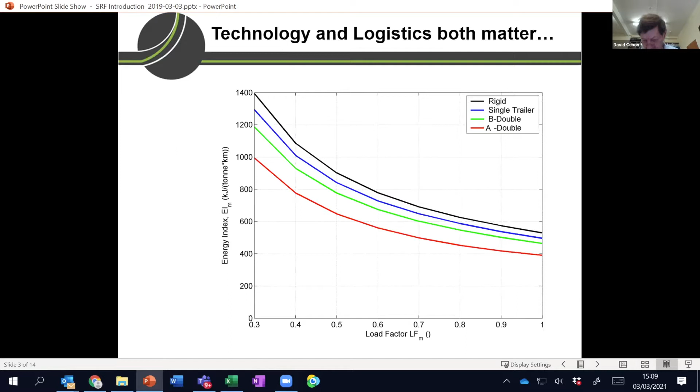Let me just show you one little graph. This graph shows the energy performance, the amount of energy used by a vehicle in a journey as a function of its load factor. Here are 4 different types of vehicles - the load factor is 1 if the vehicle is loaded in both directions, and 0.5 if it comes home empty. You can see a couple of things: one is that if your vehicle was going to come home empty, but came home full instead, you would use 40% less fuel for the round trip. That's a lot less fuel. It's very hard - you can spend billions of pounds, euros, dollars improving engine performance or changing to electric vehicles, and it's pretty hard to get 40%, but just filling the vehicle up and coming home full gives you that.

So 40% is a lot in this game. Of course, the vehicle type matters too - you can see here that in general, if you use a larger vehicle, you use less fuel per ton kilometre of freight transported. So there's an engineering aspect of this - bigger vehicles use less fuel. There's a logistics aspect, which is come home full if you possibly can. So you can see that both of these, broadly, the message is both engineering and logistics matter. There's a lot more to it than that, but that gives you the overall picture.

Our centre focuses on 3 main things: technology and operations and policy, or engineering and logistics and policy. The organisations fit within this framework. In Cambridge, we focus on the engineering side, and Heriot-Watt's Logistics Research Centre focuses on the logistics side. Westminster is halfway between logistics and policy - we do a lot of our policy work there.

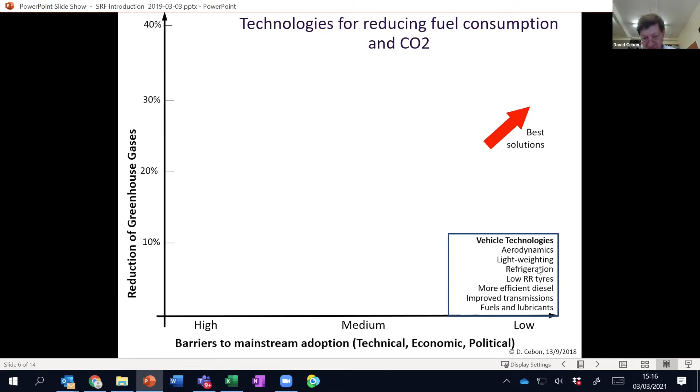I can plot solutions across this whole space - energy reduction technologies down here in the right-hand corner, which typically can save 10% carbon, like improvements to aerodynamics. They have low barriers to adoption, they're easy to do, and we're doing them now, and we can improve on those things. You can do driver training and so on. There's all kinds of solutions which fit across this whole map.

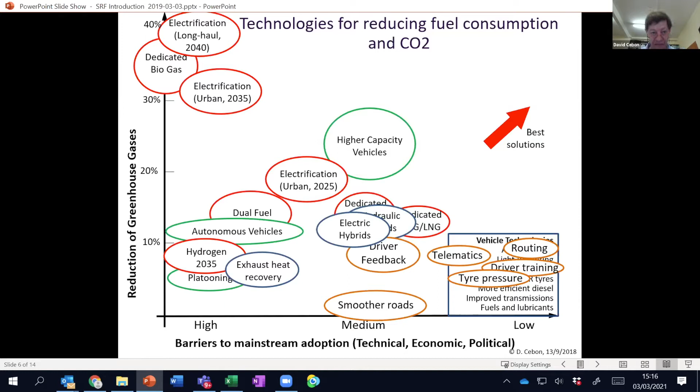And none of them are in the top right-hand corner, which is where the very best ones would be. There's a bunch of solutions that are high up on the left-hand side of this graph, even higher up than the ones that are shown, and they are the real silver bullets that are out there, but they have high barriers to adoption. They've got all kinds of issues that have to be solved before they can be adopted.

We look in the center at a set of technologies which are basically in the upper right-hand corner of this chart - they're the ones we're looking at for research purposes. We don't look at the ones down the bottom left-hand corner because they have small benefits and high barriers. We think about projects that can reduce barriers to these big win technologies, like electrification of the long haul or electrification of urban vehicles, biogas, and so on. Can we reduce those barriers and push them to the right? Can we increase the impact of the things down the bottom, improve the performance gained by aerodynamics or lightweighting, driver performance?

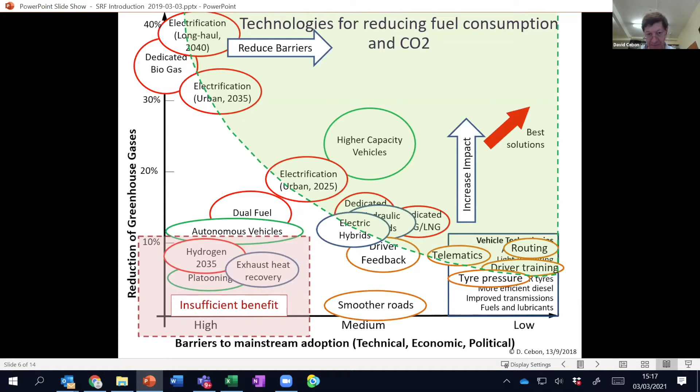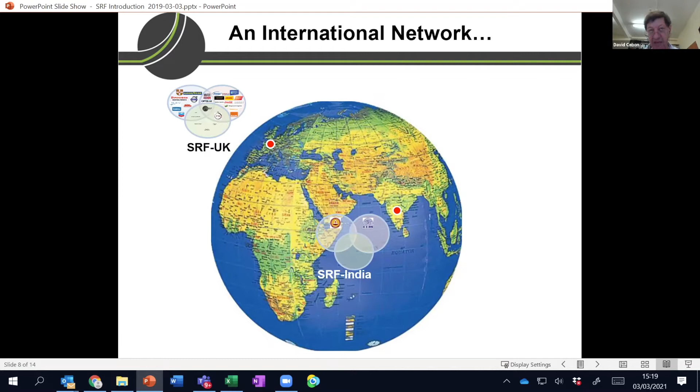Just one other broad thing is that we have our little organization in the UK, Centre for Sustainable Road Freight. We think it's very important that the whole world decarbonizes road freight. We've set up a partner organization in India with IIT Madras and IIM Ahmedabad, two really top schools for engineering and logistics.

We set up another organization in China with Jilin, Tongji and Zhejiang universities, again in logistics and engineering, and another one in South Africa with WITS and Stellenbosch universities. In each case, there's a bunch of industry partners on both sides, on logistics and engineering and policy. So we've set up these four organizations all around the world, and that's a great system because we all have the same mission and we all have the same structure and we all partner together.

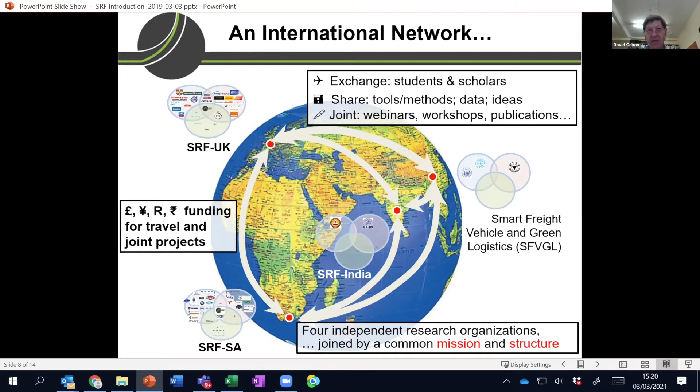Looking at each other's problems, we can exchange students and scholars, we can share tools and methods and data and ideas, and we have joint webinars and can write publications together. It's quite easy to get funding for travel, in the old days when we used to do that, and joint projects and so on.

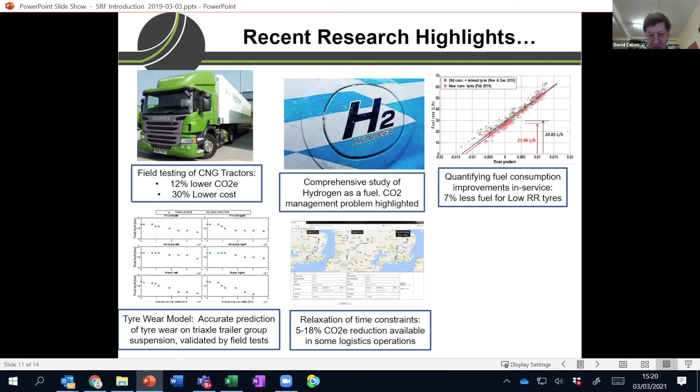I will not go over research highlights because I don't have time, there's lots of them. I'll draw some conclusions. We've got a strong ecosystem consisting of industry, government, academia. We've got customers and suppliers and partners and regulators, all in the pot, all working on sustainable road freight issues.

We've got a strong research team across logistics, engineering, and policy. We've got a holistic approach to R&D in the sector, from the logistics and operations, the soft side, to the engineering and science, the harder side, to the policy. We've got a global problem, and so we've set up a global international network.

We think we have an opportunity to make a significant difference to the about 7 or 8% of the world's carbon dioxide which is emitted by road freight. Thank you.

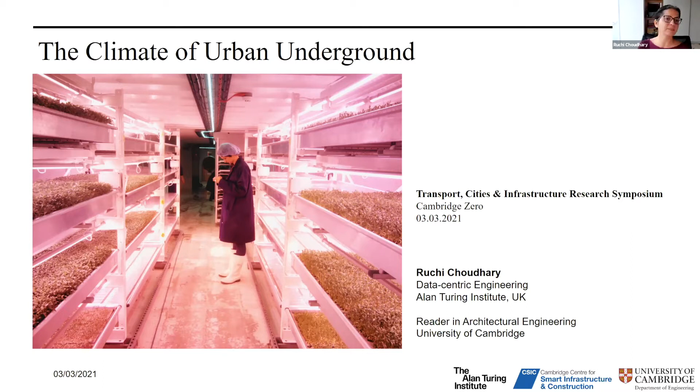So I'm going to be speaking of the subsurface. I'm going to take you to the underground, and it puts us right at the interface of infrastructure, cities, and transport infrastructure in particular. And I'm going to be talking about how to sustain the climate of the subsurface. Often when we speak about climate issues, climate change in particular, we are very much focused on the city above ground, and naturally so - it's something very visible, we can see the effect. But at the same time, we have plenty of reasons why we need to also track the climate of the underground. So why do we need to do so?

With urbanization and land constraints, we see increased use of underground surfaces or spaces with deeper underground structures, which leads to different so-called phenomena of subsurface congestion. In fact, we're not the only ones - people have become aware of the need to regulate and understand the subsurface, and it's a well-established area of study in geography and environmental studies. Indeed, the first master plans of the underground, which started looking at how to plan cities underground, arose in Helsinki and more recently in Singapore in 2019.

And within all this, whatever we build underground in terms of structures, whether we live in them or transport goods or services in them, they have a significant influence on the surrounding ground, its hydrogeological makeup - any time you give a heat input into the ground, it has an impact on ground temperatures, but also groundwater flow. So tracking underground climate is important for the resilience of ground resources such as water and energy, but also in the long term for the energy efficiency of your underground structures and any systems residing in the subsurface.

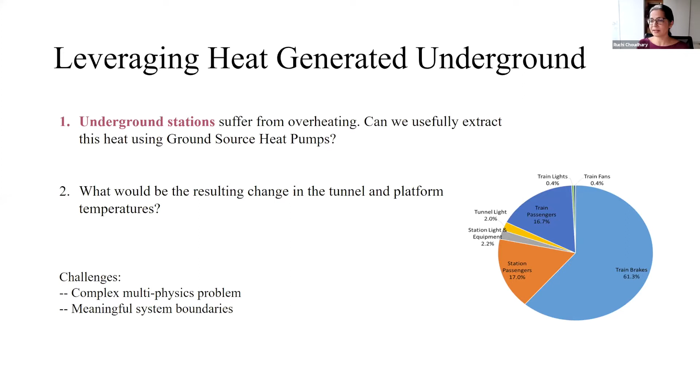That ends up being a complex multi-physics problem. Also, a lot of what happens in the subsurface is a big unknown. So it becomes very difficult to establish system boundaries when you're talking about entire train lines versus heat exchangers, not everywhere, but partially in some areas. We can only partially know where these train lines are running, and we know there's a whole mess buried with all sorts of infrastructure lines.

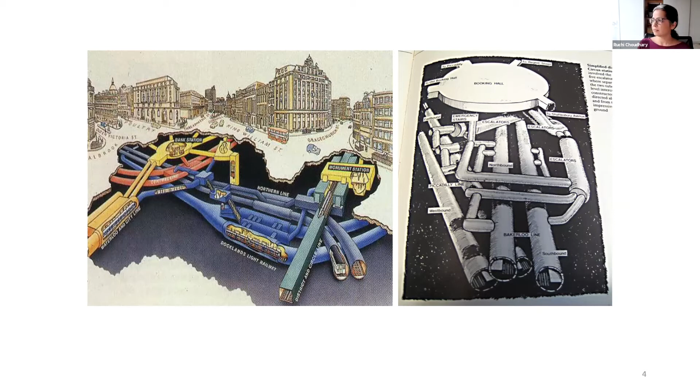So it's difficult, in a pragmatic sense, to tell where you can usefully leverage the heat that's generated. But it also comes with challenges with respect to timeline, because the best point at which to act is at the time when construction is being planned. Any retrofit later on is far more costly underground than when it's in planning stages.

With respect to model complexities, if you want to model an entire train line over several kilometers, that's a different kind of challenge. We found what suited best was to take an abstraction where we'd have a one-dimensional model of the Central Line as an example. So we started working with this, applying symmetry assumptions and similarities of stations across the line, and identifying which ones we need to model in more detail.

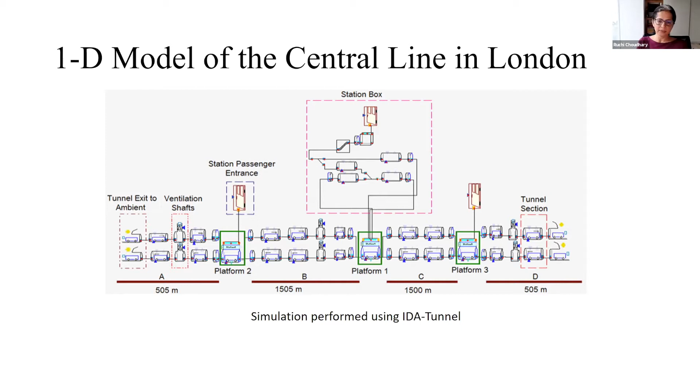But to integrate that with the analysis of the ground heat exchangers became a multi-physics problem, because the representation of the ground heat exchangers is a three-dimensional problem requiring different types of finite element solvers. So we did what we call a co-simulation framework, where two simulation worlds — the 1D Central Line model and the ground heat exchangers — could exist independently, but iterate and exchange information over time steps.

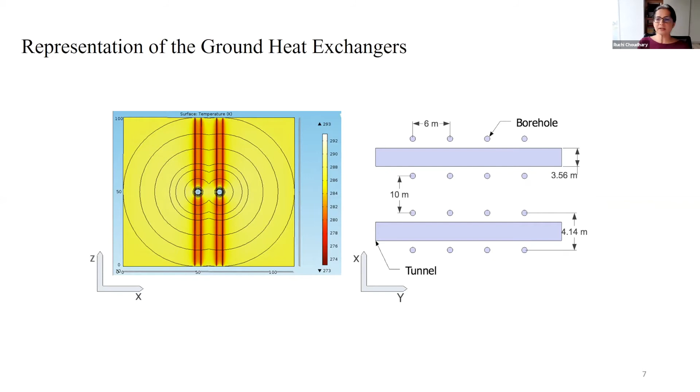The result of it, what we really wanted to show was how much we'd manage to cool the tunnels and platforms if we were to put heat exchangers in the ground surrounding the tunnels at different spacing and locations. Indeed, we can get up to a 5-degree difference if you extract heat that's generated in the tunnels, thereby saving you the need to cool the tunnels during summertime.

The co-simulation framework was important and necessary, rather than just assuming you'll extract a fixed amount of heat, because of the variability of behavior along the line — and to work out exactly what configurations of spacing along the boreholes and distance from the tunnels would make sense.

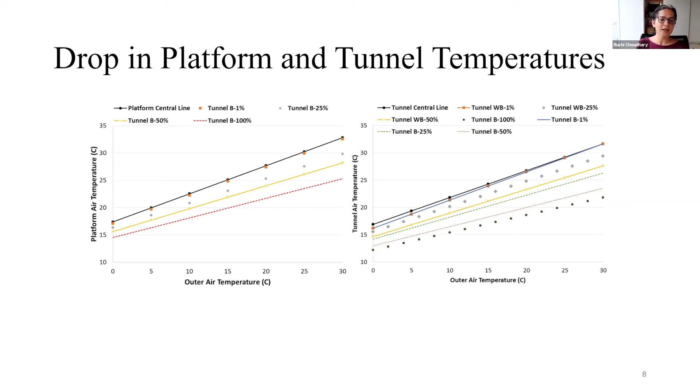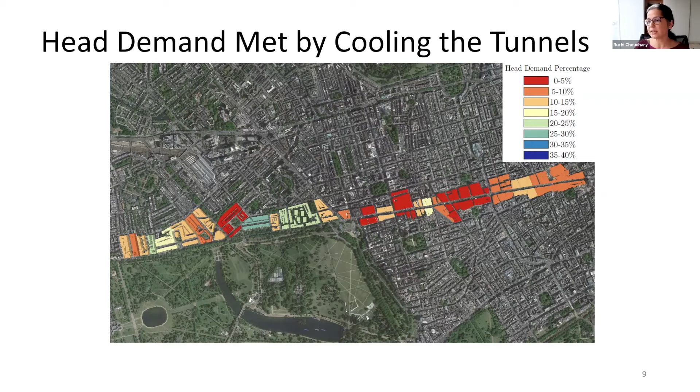With this information, we did further analysis and took a section of the line — you recognize Hyde Park, and on the north side, Regent's Park peeking down. We picked buildings around the Central Line and allocated them into clusters of similar thermal demand. Essentially, one borehole along the tunnel could serve the heating needs of one UK household on average, or the hot water demand of all the building types across all the clusters here.

Of course, the key assumption we made is that you're extracting uniformly along the tunnel line, and that we were optimizing the entire system to cool the tunnel rather than to extract as much heat as needed above ground. This was an exercise highly focused on saying: we want to cool the tunnel down by 5 degrees — if we extract that heat, how much will it serve above ground?

Moving forward from this project — I don't know if many of you were following the news three years earlier — there were a series of very interesting articles in the newspaper following a study conducted by geographers at Newcastle University, talking about underground development and its increase in London, in particular because of planning constraints.

My reaction to this was: if it doesn't affect the climate underground in the long term, then why not? Why can't we exploit resources underground to the extent that's possible? Sure, if there are 1,000 or 2,000 buildings having a marginal impact on the overall climate, you can continue to do that with no problem. But what if it started happening in a manner that was not regulated? So we said, okay, let's figure this out.

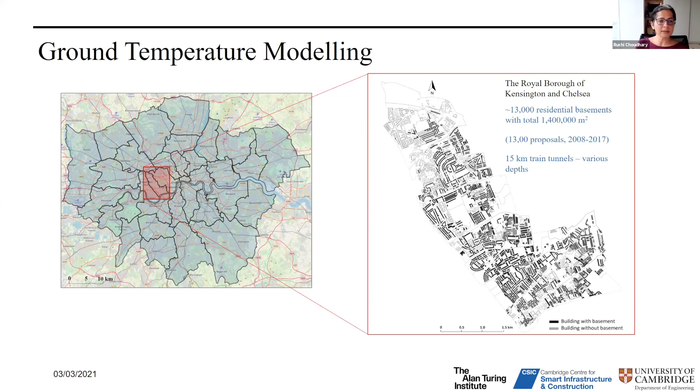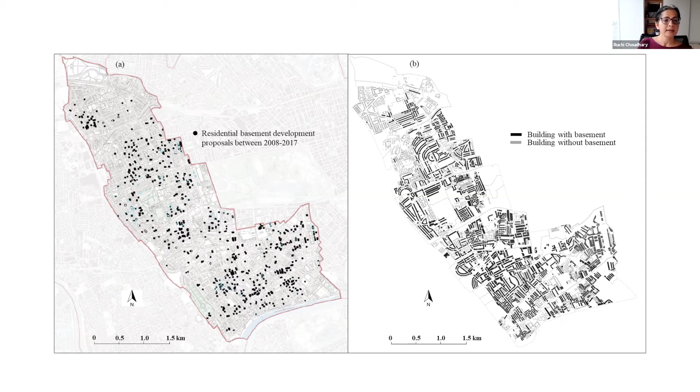This included also the new basement proposals that came through between 2008 and 2017. We added the train lines passing through the borough, along with the detailed geology and hydrological information we got from the British Geological Survey, who have been excellent partners ever since in this work.

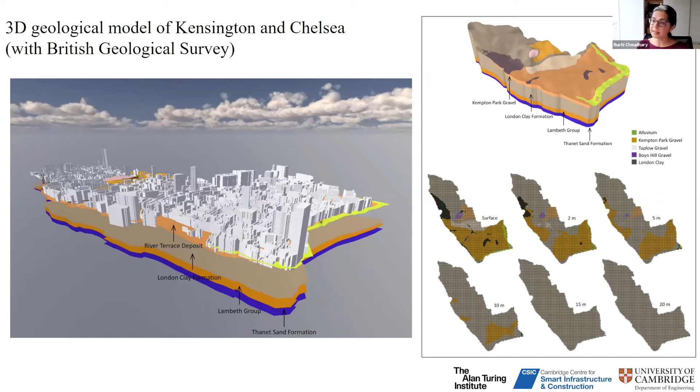With all of this information put together, we had to translate it into a numerical model, which required some degrees of abstraction - whether it's how to model the train tunnels as they go down, or how to model the entire 3D domain of the borough, as well as the residential basements, and of course the geology and hydrology.

On the contrary, if you're where the ground is more permeable - gravel in this case - the groundwater flow smears out the heat sources. So I'd be less concerned about where the ground heat exchangers were located in order to optimally extract that heat from the ground.

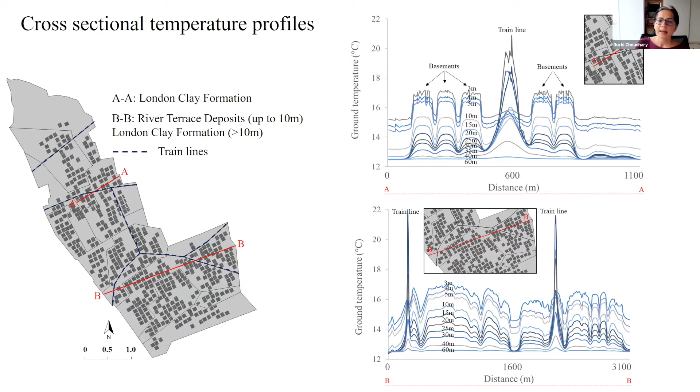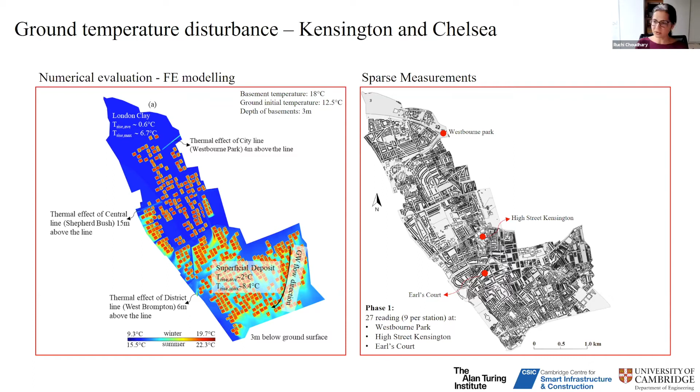One of the key challenges in doing such large-scale and complex models is that a lot of the input parameters you give can be highly uncertain. One of the ways we as engineers tackle that problem is we get some data and try to match our data and model. But that proves challenging at this scale, especially in the subsurface, because measurements are sparse.

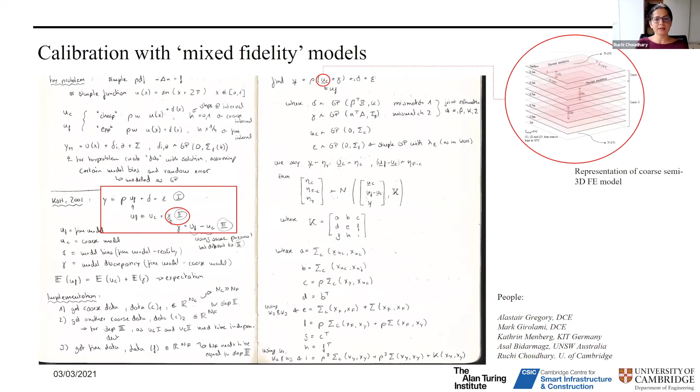So we've been working on tackling that challenge in terms of developing new kinds of calibration techniques with mixed fidelity models and sparse observations, to be able to infer a bit better on the most influential parameters that govern the behavior - in this case, the thickness of gravel, the density of basements, the initial temperature, or the surface cover type.

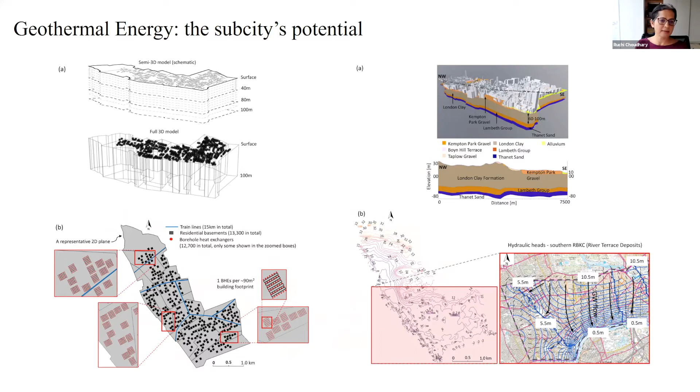Going forward, we did a similar exercise, taking all this information and doing a little exercise on the geothermal potential of this area. The key message here again: the left part is sitting primarily in the impermeable London clay formation, and the right part is in the terrace deposits.

Here we're trying to ensure the ground doesn't go below freezing point, because if you keep extracting heat from the ground, you'll freeze the ground at some point over the years. The effect is less when you're in the terrace deposits, because the behavior is governed so much by the groundwater flow, which smears it out - allowing extraction from most locations with much less of this ground-freezing phenomenon. Whereas on the left-hand side, you can be more susceptible, especially at greater depths.

The point is that there would be spatial variabilities of the subsurface potential, depending on what we're doing, and also on the hydrogeological makeup of the ground. That's important to consider as we begin to look into the subsurface for all kinds of exploitation, be it energy or space.

And I will stop here. We have a very good team working on this and good collaborations, and more ideas and more collaborations from the audience would be welcome.

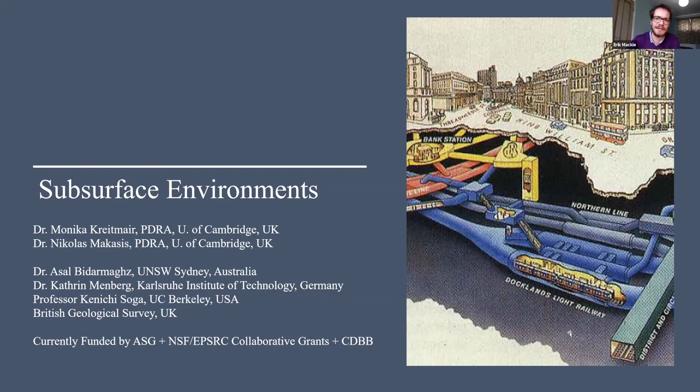Here's a question for you that's just come in on the Q&A, so let's go straight to that. The question is, can basements be dug out from scratch, or do they need to come at the creation of the building? I guess, can they come afterwards?

Well, I won't claim to be an expert on that, but if you walk around London, especially in the current climate where we do have the time and space to do construction, you'll see these boardings, and if you look carefully they will tell you these are dedicated new basement constructions happening on existing buildings. So yes, in terms of cost effectiveness, the ideal time is to do them earlier.

I was also going to ask, there's obviously a lot of potential here to use heat that's trapped or stored in the ground for a range of things, including heating of homes. So are you seeing much interest in application of what you're working on to use directly as heating for homes, as a way of decarbonising heating and getting away from gas in London and elsewhere?

Well, there has been a continuous interest in this, and in fact the biggest barrier is the cost of drilling the borehole. So it's the cost, but it's also the space that's needed. So that's always the challenge.

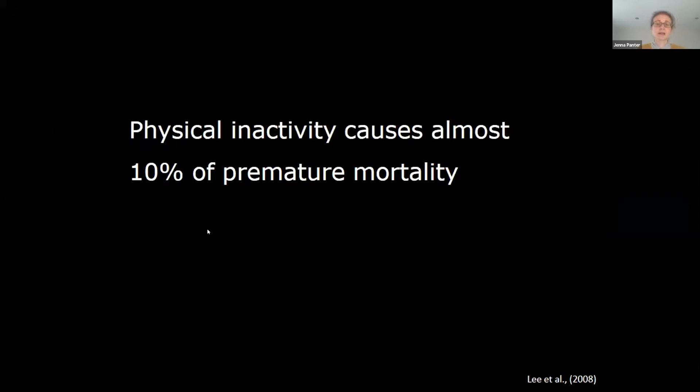Now, physical activity is a recognised strategy central to the prevention, treatment and management of diabetes and obesity. Physical inactivity itself was responsible for almost 10% of global premature mortality in 2008, which equated to about 5.3 million of the 57 million deaths that occurred worldwide in 2008.

So with the spread of COVID by airborne particulates, air quality and ventilation is higher on people's priority list. Results from an ecological study in the US suggest that areas with higher rates of air pollution also have correspondingly higher rates of COVID deaths. And these results are confirmed from a study in Italy. Whilst these studies are ecological in nature and therefore not conclusive, it suggests that people living in these areas may be more vulnerable and that action to tackle air pollution is even more important.

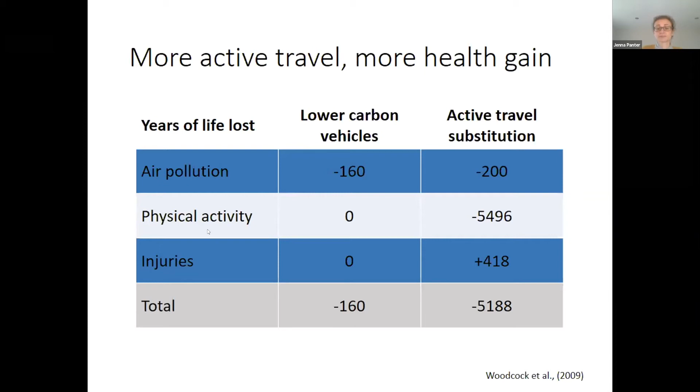So there may be concerns that shifting people to walking and cycling might not translate into gains for health if people compensate for that activity. Fortunately, our research has found that people who take up walking and cycling for transport don't compensate by doing less activity at other times, finding that when they take up these forms of travel, their levels of recreational activities such as going to the gym or playing football, and total activity, increase.

Similarly, for those who switch from the car to more active modes of travel, we see reductions in measures of body mass index, that measure of obesity I mentioned earlier from the Global Burden of Disease study.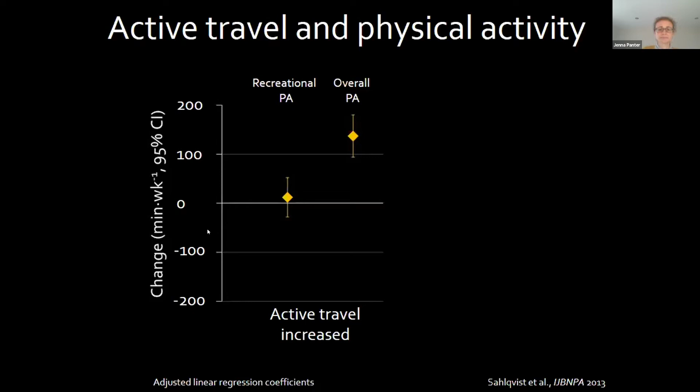So what are the carbon impacts of switching to walking and cycling for transport? A previous study in Cardiff showed that if 41% of car trips - those short trips, less than 3 miles, which are easily switchable - were made on foot or by bike, there would be about a 5% reduction in carbon emissions. The trips that were not easily switchable were ones where a short trip involved multiple destinations in the same trip.

That's so-called trip chaining - they involved escorting someone to or from a place, or shopping trips to large retail areas, which often involve the purchase of bulky items. Similarly, in a European study which followed 2,000 people over time, those who switched just one trip per day from car driving to cycling reduced their carbon footprint by about 0.5 tonnes a year, representing a substantial share of average per capita carbon dioxide emissions. The largest benefits from shifts were for business travel, followed by social and leisure trips, and commuting to work or study.

So how might we design our towns and cities to enable people to walk and cycle? Well, the historical and recent investments in road building will make that challenging. But what about if, alongside that, we built more footpaths, pavements and cycle lanes that connected with the public transport routes to make a more integrated and connected route?

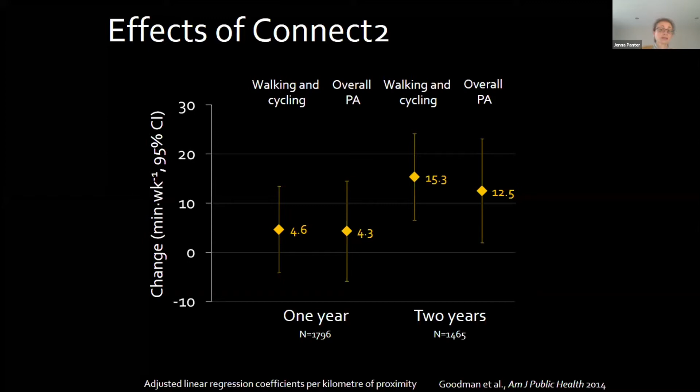So how did this new infrastructure impact on carbon emissions? Unfortunately, these effects didn't translate into sizable carbon effects, as neither living near the infrastructure nor using it predicted changes in carbon emissions, either overall or disaggregated by journey purpose.

So this lack of discernible effect on emissions is consistent with an interpretation that some living near the infrastructure may have simply changed where they walked or cycled, while others may have walked or cycled more, and many may have substituted active for motorised modes of travel, but few as a direct result of the intervention.

So while the findings to date can't exclude the possibility of small effects of the new routes on emissions, a more comprehensive approach of a higher dosage of active travel promotion, linked with policies targeted at reducing motorised transport, are needed if we're going to achieve the substantial carbon savings needed to meet climate change mitigation and energy security goals.

So our past work has shown that these policies to reduce driving could be really effective in changing behaviour. In a longitudinal study, we found that where people had no parking at work, they were much more likely to switch from a car to active modes.

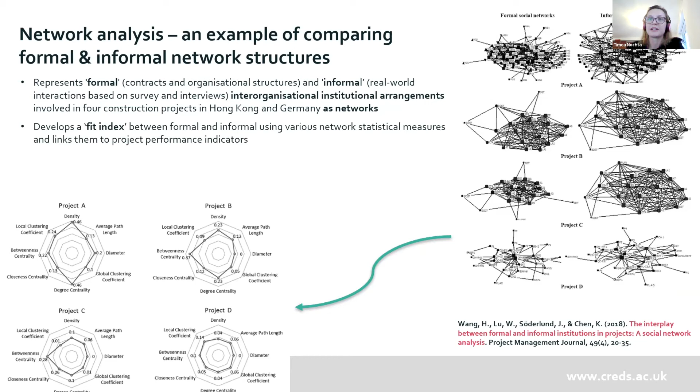It goes on to develop a fit index between the formal and informal networks using various network statistical measures, for example network density, average path length, node centrality measures, and then links them to project performance indicators. The authors found that this fit between formal and informal institutions is positively correlated with project performance. So this is an example that highlights the importance of understanding the interplay between formal and informal institutional arrangements and their impact on real-world outcomes, in this case project performance.

Going forward, in addition to the structural analysis of networks, we also want to understand how actors involved in these governance networks perceive the challenge of low carbon mobility and how this impacts the actions they take to address it. In order to do so, stakeholder workshops will be used to facilitate discussion and collaboratively identify variables perceived to affect movement towards low carbon mobility, for example issues such as propensity to cycle or access to funding.

Connections and causality between those variables, for example positive or negative links, will be identified. Workshop outcomes will then be represented as visual causal loop diagrams to facilitate discussion, to understand which of the variables participants feel they are in fact in a position to influence and why, and the extent to which they do influence them directly or indirectly.

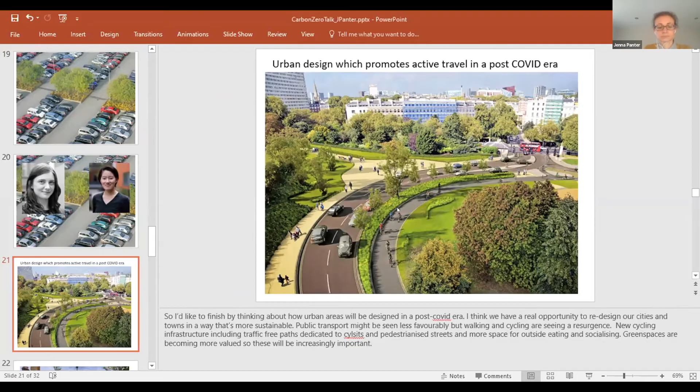Oops. Can you see those? Not yet, no. Okay. You see those now? It's just coming up now, yeah. Oops, yeah.

I keep worrying that I'm going to have a power cut suddenly and that I'll cut out. So I can just imagine the pain.

So I don't know at what point you lost me, but I think I was just talking about the disincentives and how hard they are to evaluate because they're not so politically and publicly acceptable. I was just going to say that Emma, who's a postdoc in our group, will speak later about some of the work we've done about understanding what needs to happen to get these interventions implemented. And one of our postdocs, Christina, I think has already spoken in this series about her review on these so-called carrots and sticks.

As she showed, there are relatively few studies that look at the before and after effects of these types of interventions. So I was just going to finish by reflecting on how I thought urban areas might be designed in a post-COVID era.

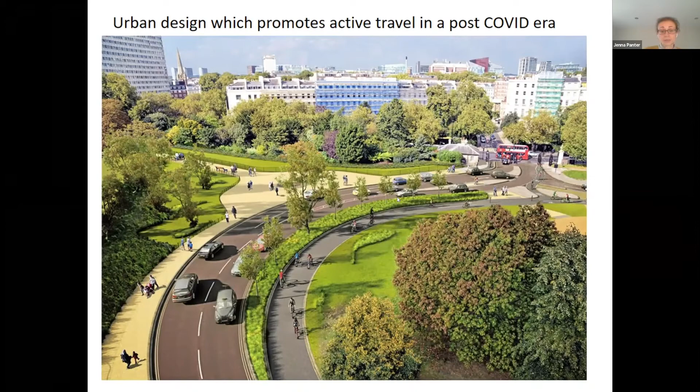I think we have a real opportunity to redesign our towns and cities in a way that's more sustainable. Public transport might be seen less favourably in the COVID context, but walking and cycling are seeing a real resurgence. So I think new cycling infrastructure, including traffic-free paths dedicated to cyclists, pedestrianised streets, and more green space for outside eating and socialising would be important. Green spaces are becoming more valued, so these will also be increasingly important. But with large swathes of land being unavailable, I think interventions like modal filtering of streets, which prioritises pedestrians and cyclists and restricts motor vehicles, are going to be much more common. They're going to be even more important for transport, but also as a place to meet and socialise.

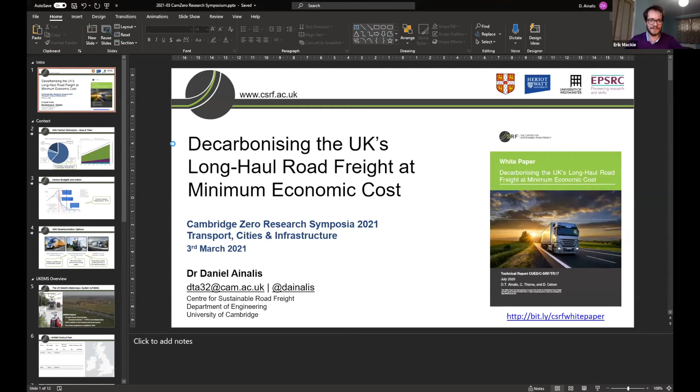Great, thanks very much, Erik. Good afternoon, everyone. So as Erik said, my name is Daniel and I work at the Centre for Sustainable Road Freight. And I want to talk to everyone today a little bit about some highlights and a high-level overview of this white paper that we produced in July of last year.

And so we're specifically looking at how to decarbonize our big heavy goods vehicles that carry around our freight in time for 2050.

So just a quick snapshot of where we are and where we're going. In the UK, we know that transport is the largest emitter by sector now, and road transport has a big portion of that. And while that's dominated by passenger cars and light duty vehicles, for a relatively small fleet size, HGVs in the UK contribute around 18% of road transport emissions, and that corresponds to about 5% of the UK's total. So for a relatively small fleet, they really do have a significant impact on our carbon emissions, and they're really a hard to abate sector, and I can discuss that in a moment.

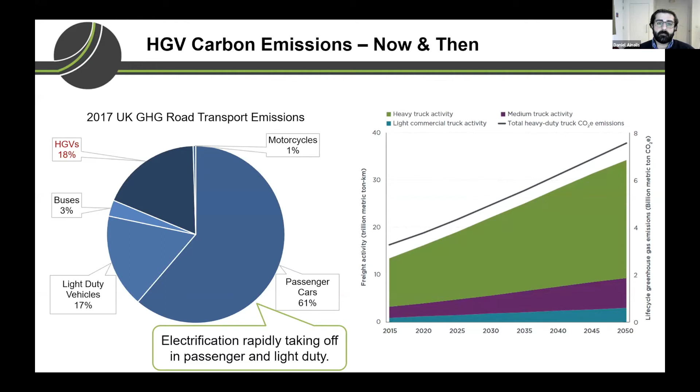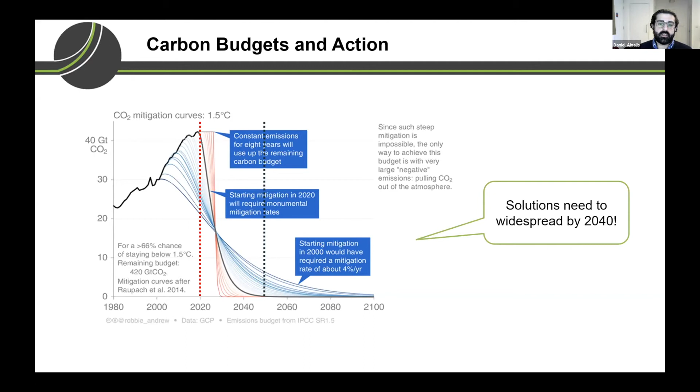We can't really be waiting until 2045 and then in the last 5 years switch everything on and get to net zero. We really need to start taking action now and making deep inroads where we can. So what we want to see is any solution needs to be widespread by 2040, so it needs to be out there and everyone can access it.

And so this brings me on to the three primary options that are available for decarbonising HGVs. You have the large onboard battery electric, such as the Tesla Semi, with rapid or fast chargers supporting them. You've got small onboard battery electric HGVs that are supported by an electric road system. And you also have hydrogen fuel cells, which are essentially an electric powertrain with some hydrogen storage tanks and a fuel cell on board to be able to convert that hydrogen into electricity.

So without going into too much detail about why we have chosen the middle option, which is an electric road system to support small onboard battery electric vehicles, you can read more about that in the white paper. The main benefits provided by such an infrastructure-vehicle combination are that we've got a system that is mature, scalable, and shovel ready.

So in terms of an electric road, we're looking at something like the Siemens e-highway, which you can see in the middle there, which functions essentially like a train pantograph overhead line system. I'll explain a little bit about the details in a moment, but these systems have been proven and tested and they're ready to go now.

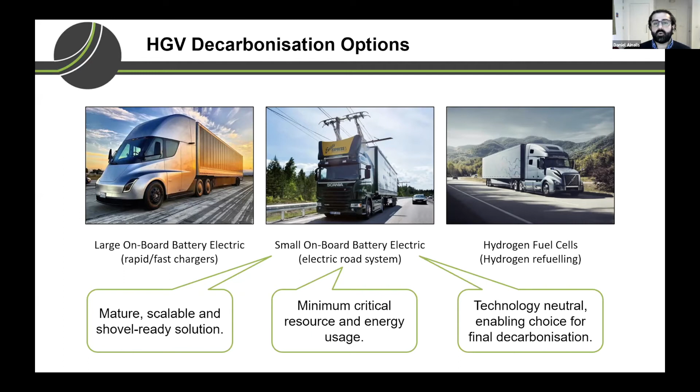So we've got this proposal that we put together, which is called the UK Electric Motorway System, the UK EMS. It is founded on having an electric road system, a Siemens e-highway, across the UK, about 7,500 kilometres, including all the associated infrastructure.

And so the system you can see on the top left here is that along the side of the motorway, you've got a series of poles and arms that support the catenary wires, which sit over here. And then the vehicle has an active pantograph system that's able to connect up and down. So when it joins the motorway and goes into the lane where it's electrified, it can easily connect.

And then if it needs to move out of that lane, it can automatically retract, or that can be done at the push of a button. So the vehicles still maintain their mobility without having to sacrifice that connection.

As part of the proposal, we talked about and specified some HGV vehicle architectures that would be suitable for the transition period and beyond. So the transition period is really important, because while this network is not built out, we need to be able to ensure that your Amazon packages and your supermarket groceries can still be delivered.

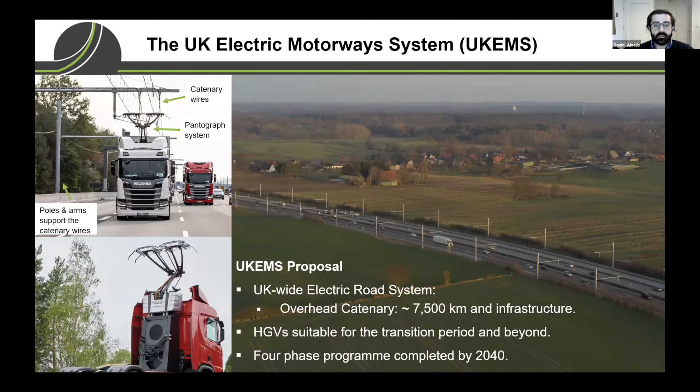And the program that we put together is comprised of 4 phases and can be completed by 2040, so it can be ready in time for net zero.

Just to give a quick overview of the rollout plan, I've got a map of the UK here, and I've got all 4 phases that will step out. In each phase, we've got the length of electric road system that's covered, the cost of each section, how much HGV kilometres are covered, and then we've got an estimate of the carbon savings that we can get for all HGVs in the UK.

So the zeroth phase is a pilot phase, which we need to do to de-risk the rollout and work out how to build these in the UK, what's different, what planning permissions are needed, and so on.

And so that trial will then set up a first phase of a large scale rollout that you can see, for about £5.6 billion, would cover almost 50% of HGV journeys. And you can see it goes from Dover up around the M25 in London.

It travels up to the north and covers across from Liverpool all the way out to Immingham and Grimsby and Doncaster out that side. And also it's got a connection to the port of Felixstowe. And that will provide a reduction of around 31% of the carbon emissions for HGVs.

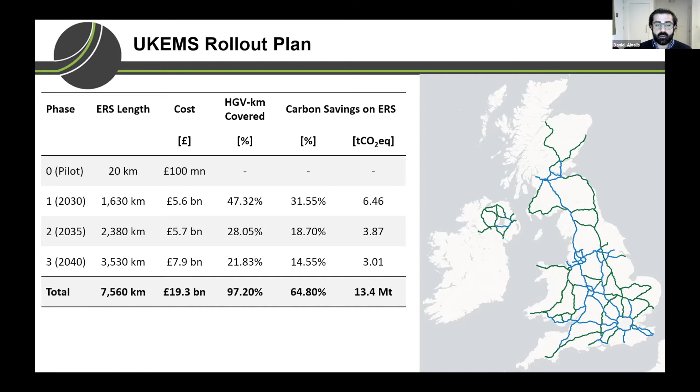We did some simple economic evaluations to look at how the economics will play out across the infrastructure provider who would build it and sell electricity, the fleet operators, and the Treasury.

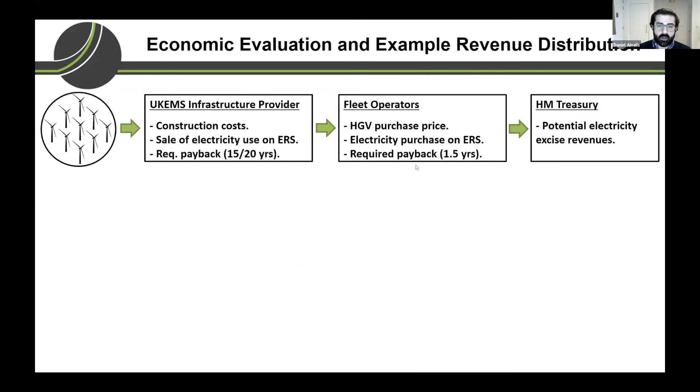And I'm running out of time, so I will skip over this very quickly and just say we can't get rid of HGVs, they're vital to the economy, but we really need to decarbonise. And so we have a proposal that can do that for an affordable price, and we can see a future where the UK can be completely decarbonised from a freight perspective.

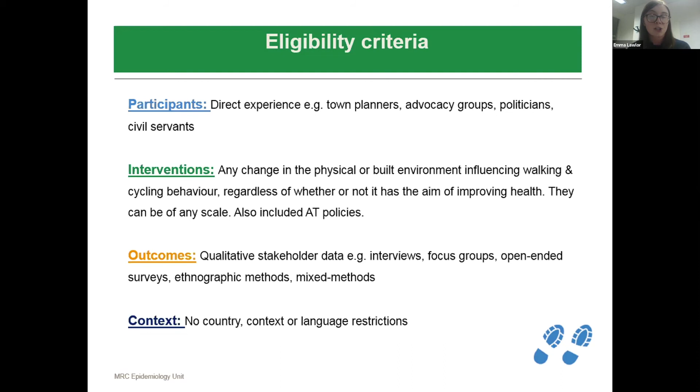After reviewing these, we decided to tighten up our inclusion criteria slightly, because originally we had more of a broad focus on physical activity rather than active travel. Once we had done this, it reduced the number from 133 down to the 37 studies that we included in our review.

The majority of the studies focused on walking and cycling, and they all used individual interviews, supplemented by other different methods as well, and the majority were in developed countries.

From the thematic analysis of the qualitative data, there were 4 main overarching themes that we found. Firstly, it was about identifying the right people to actually bring about change. People could be from a range of disciplines, from multiple levels of the decision-making process, and from different time points of the process as well.

This included different political leaders, members of government, community representatives, community associations, advocacy groups, and not-for-profit groups. The key considerations in identifying these people were whether they had the capacity to help, power to influence, knowledge of the local area and active travel issues, the ability to access and mobilize resources, willingness to have difficult conversations and risk opposition, and a personal interest in active travel—often because they did it themselves.

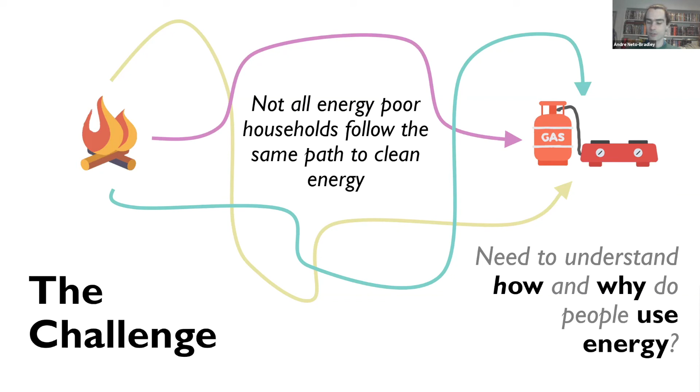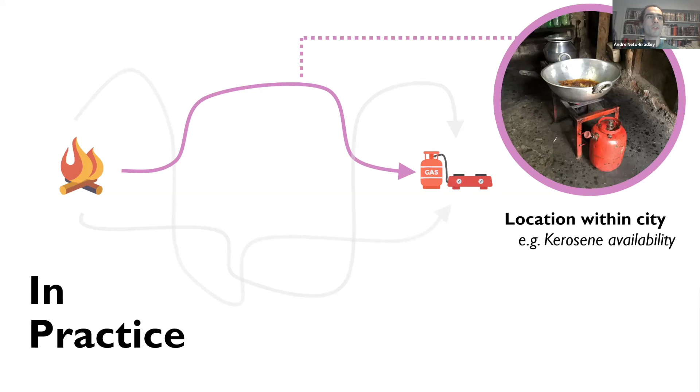And we identified different common types of households or pathways characterized by different types of barriers. Some of these barriers were related to where you are. For example, kerosene is an alternative cooking fuel that has in the past been commonly used for cooking. But as subsidies have been rolled back and availability has become less widespread, households have been forced to make a choice if their local shop no longer sold it. Some would turn to local black market or informal vendors, and others might return to using firewood for their cooking, depending on what was closer.

It isn't just where in the city you are, but also what's around you that matters. For example, households in non-notified slums, that is slum dwellers without legal rights to their lands, often already have poor access to utilities and infrastructure to begin with. And they often can't access the subsidies that are available, even though they are meant for low-income households, because they require a bank account for them to be reimbursed.

And on top of where you are and what's around you, energy use and fuel choices are also shaped by household practices and habits. So many households we spoke to talked about how they would change what they cook if they needed to save some money. Rice can be cooked quite frugally on a traditional wood stove, especially when compared to cooking bread on a gas flame.

And so looking at this all together, we can see that a household's energy transition can be influenced by this interaction of a household and its practices and habits, its location, and its local socioeconomic context.

In our fieldwork, we had the luxury of relying on rich, detailed data that we collected ourselves. But this sort of work is resource intensive, and many cities in India have limited, if any, data on energy access and use by their lower income households.

So we've been working on a modeling approach that could help local stakeholders identify potential inequalities in clean energy access across a city using publicly available data. Our approach models individual households, factoring in local socio-cultural context, households' habits, behaviors, and practices, all using publicly available data in a sort of micro-simulation.

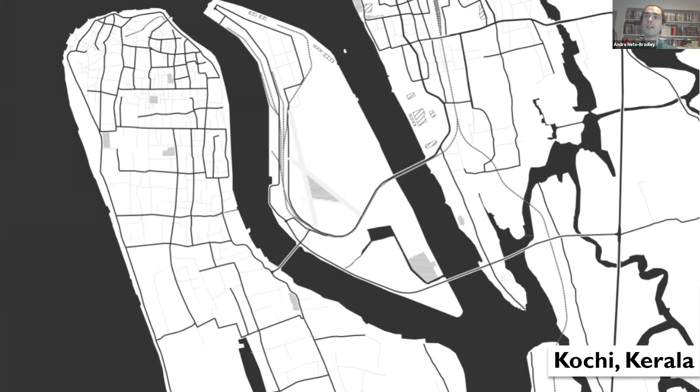The first thing is that, much as we'd expect from our fieldwork, the uptake of gas as a cooking fuel does vary across the city, as shown here, with differences between wards and trends in spatial distribution.

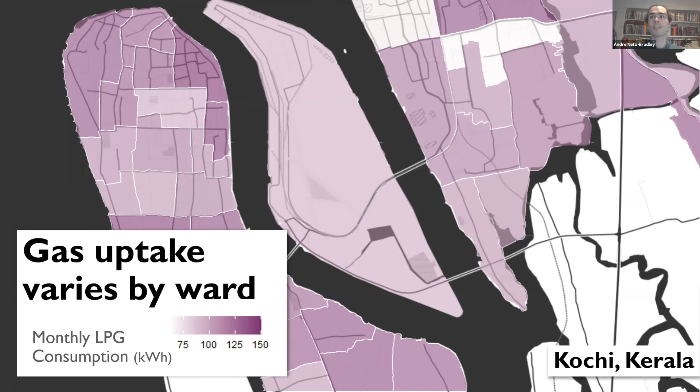But more interestingly, by modeling the effects of local sociocultural context and spatial effects, we can estimate how wards within the city compare to one another and the city average. This can be helpful to identify wards that might be at greater risk of lagging behind as a result of challenges or barriers to sustained clean cooking.

But as we saw through our fieldwork, energy transitions are not a clear-cut thing, and just because a household has access to gas does not mean that it's achieved a sustained transition.

For example, if we look at these two wards with slightly above average uptake of gas, we also see, if we look at their residual biomass use, that this is actually slightly higher than some of their neighboring wards. So for households in these wards, the challenge isn't so much getting them to adopt gas or have access to it, but ensuring that they reduce their ongoing reliance on biomass fuels.

Now, by modeling across the city, we also get a sense of the bigger picture of socioeconomic and spatial inequality and how energy use relates to it. If we take a look at some of those wards we'd highlighted on the previous slide, these were wards with low gas uptake, and they also have higher levels of continued reliance on biomass.

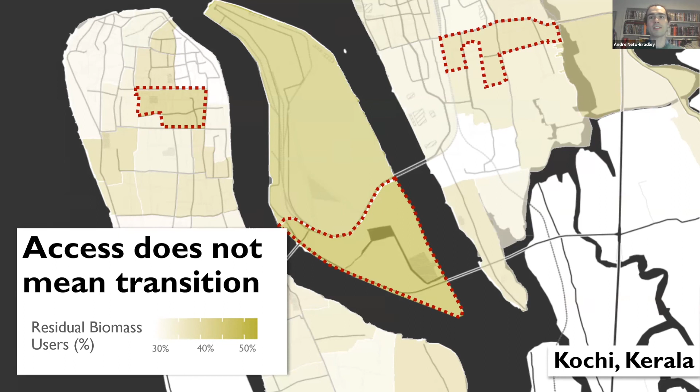We interestingly see that they also all have a higher proportion of households relying on income from what's called daily wage labor. This is unskilled, slightly precarious employment that can make it difficult for households to save up for monthly payments of LPG, since they buy the LPG as a canister rather than piped.

But our model also locates energy use and access within the city, which allows for further analysis and context setting. If we look at this ward in the Central Island in more detail, just below a naval base by the main road, there's a large migrant labor community. Their living circumstances are somewhat informal, and many rely on wage labor for income. What's more, they're also physically cut off from most of the city, almost a 20-minute walk from the next nearest civilian neighborhood, at least.

While they do have access to gas, reliance on less clean fuels is quite common. So use of biomass and kerosene alongside gas stoves, or in place of gas stoves, is fairly common.

Now, the model alone is not a decision-making tool, but it can help highlight issues such as these and start a discussion on interventions and strategies that is somewhat more cognizant of the views of the marginalized, by estimating spatial distribution of differences in clean energy access.

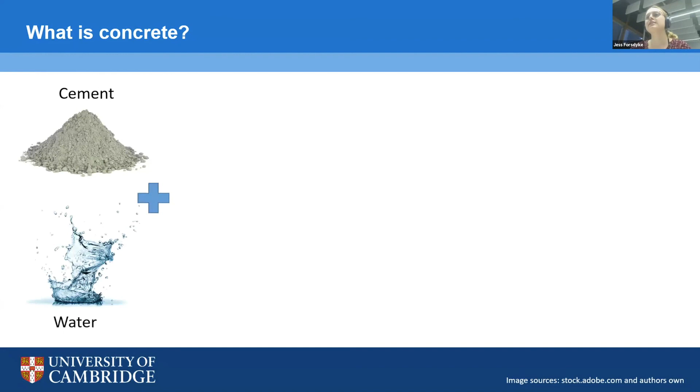We often hear the words cement and concrete used interchangeably, which really grinds my gears, but is something that society doesn't necessarily differentiate. Cement is in concrete, but there are also other parts. It consists of water and aggregates, and we split the aggregates into fine aggregates or sand and coarse aggregates or gravel.

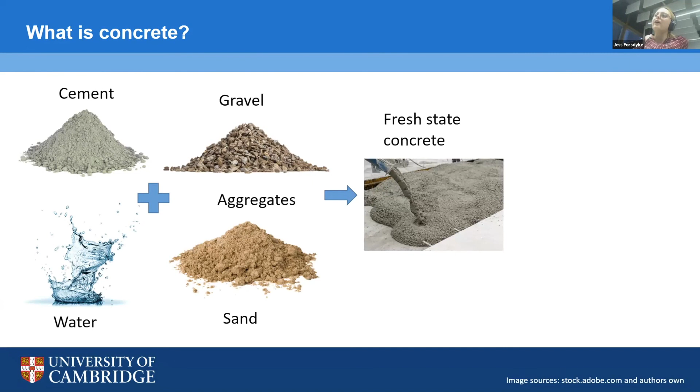These 4 things get mixed together in some proportion to form fresh state concrete or wet concrete, which we pour over reinforcement, giving us hardened state reinforced concrete. You can see there a standard car park or office block building made of it, or at the bottom an example of what we do in my lab, making smaller samples of the stuff and seeing how it performs, so that we can apply it to a particular application later.

So the particular properties of that concrete, like the strength or how stiff it is, are determined by the ratios of those 4 ingredients. It's similar to the analogy of how much egg you put in a cake batter changing the consistency of the cake at the end. But for a typical concrete, let's say you have about 15% cement and the other constituents making up the rest of the mix.

But the problem we have, the emissions source, is this cement. So when we multiply the proportions in the mix by their relative embodied carbon for each ingredient, you end up seeing that almost all of the emissions from concrete are from the cement content, even though that cement content is typically only around 10 to 20%.

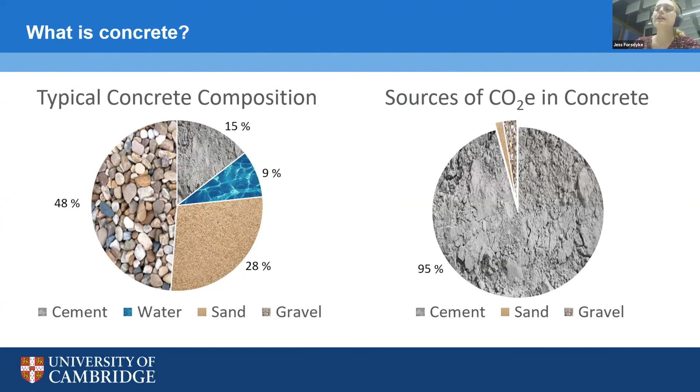So now I'm going to talk a little bit more about cement, now that we know it's something that is not the same as concrete. Cement is this gray powder, sometimes white, but normally gray, which comes in big bags like the one you see on the right there, that we use a lot of globally. We'll talk a bit more about that in a second.

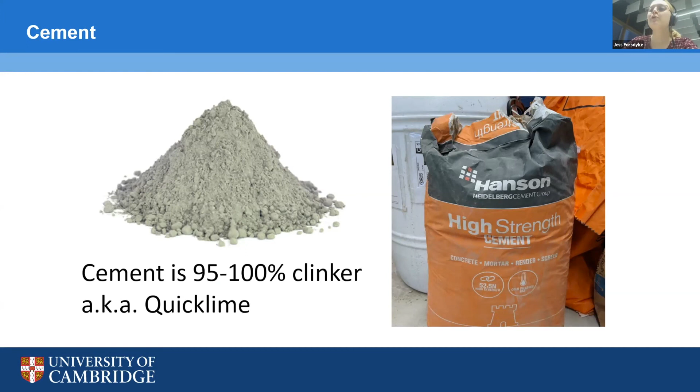It is 95 to 100% made of this stuff called clinker. We'll talk about clinker production in a second. It sometimes has the name quicklime, but has absolutely nothing to do with the fruit, so don't be misled by that name.

A little bit of chemistry now, trying to keep it simple: cement is manufactured from limestone. We basically heat it to about 1500 degrees in a kiln, and obviously that is one of the big sources of the emissions. The heating to 1500 degrees usually comes from direct combustion and is therefore a big cause of emissions.

However, we've also got a chemical release of CO2, which means that overall, even if we can completely decarbonize the grid and power this chemical reaction completely sustainably, we're still going to have around 50% of the CO2 emissions associated with cement production being completely unavoidable. Technology as to what we do with that is really kicking off at the moment.

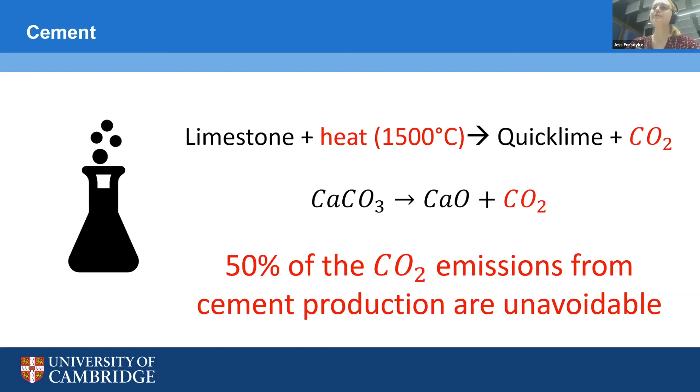So overall, this totals about 5 to 8% of global CO2 emissions from the cement industry alone. That's why the work that my group is doing is hopefully quite relevant. That's about 2.2 to 2.5 billion tons of CO2. Obviously, it depends whose numbers you use.

With the emissions accounting, it can get quite fiddly. For scale, that is about 2.5 times the emissions from all of commercial aviation globally every year. So the industry as a whole is a huge emitter, and it's something we really need to challenge. Now, on this plot, we're trying to explain where these emissions come from.

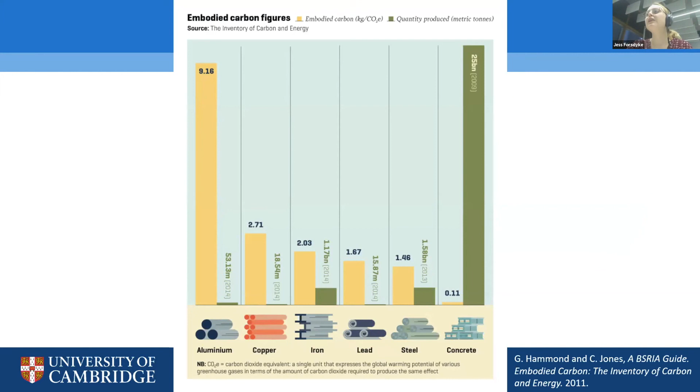If we look at concrete compared to all of the other typical construction materials, like steel and aluminium, it's actually a pretty good performer. It does pretty well, tiny compared to aluminium in particular, in emissions per kilogram.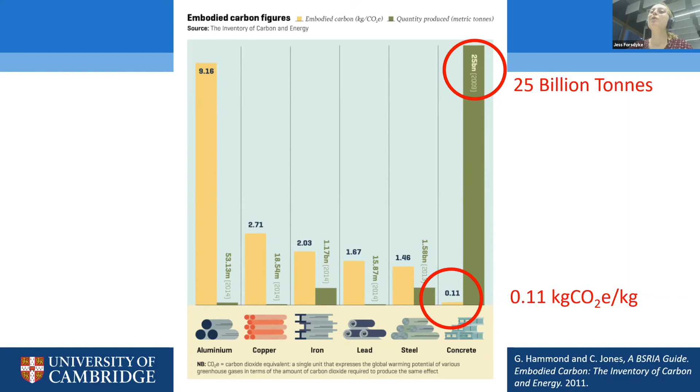The problem comes from the amount that we use. We use 25 billion tons of concrete every single year. That's equivalent to 3 tons per person alive on Earth. And if you aren't sure what 3 tons looks like, it's the weight of 2 walruses. So every single human being, we go through that much concrete every year, year after year.

And it means that it is the most heavily consumed material, second only to water in the world. So it's pretty intense. And the result is that although concrete is pretty good in terms of its carbon efficiency, as we saw before, particularly compared to steel, we also use so much of it that overall carbon emissions attributable to the material are pretty high, and that's where we get the 5 to 8% of global emissions.

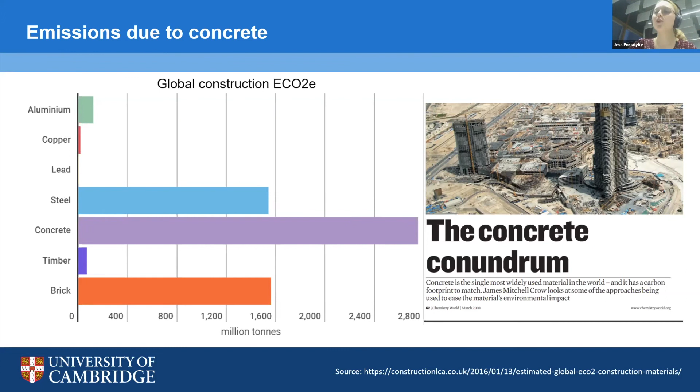And so it gets quite a lot of bad press. You can see there's one of the headlines, the concrete conundrum. So what do we do?

This is kind of where my research group is looking into. The only way really to reduce the emissions, because of this unavoidable chemical release of CO2, is to actually just cut down on the amount of cement that we use in concrete, and the amount of concrete we use overall. But we still need to build cities.

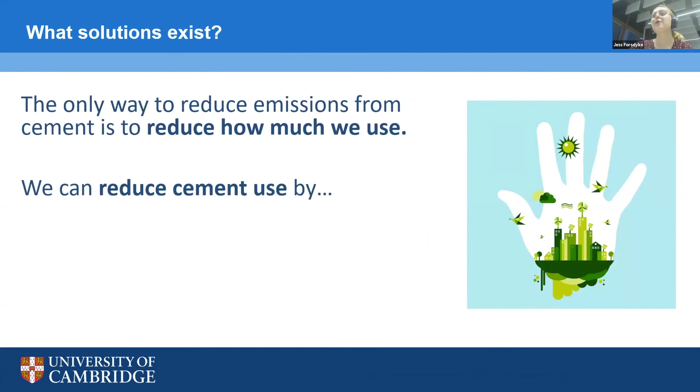So we can reduce cement use by using cement replacements in concrete. There are sort of 3 main ways really: using cement more efficiently within concrete, and improving the durability of new and existing structures. I'm just going to briefly talk about those because I'm conscious of time.

So cement replacements are basically just materials that we can use to substitute for some, but not all, of the cement in the concrete. These are great, and they were seen 20 years ago as the solution. The problem is they're usually waste products of other industries. For example, granulated blast furnace slag comes from iron production, and pulverized fuel ash comes from coal combustion.

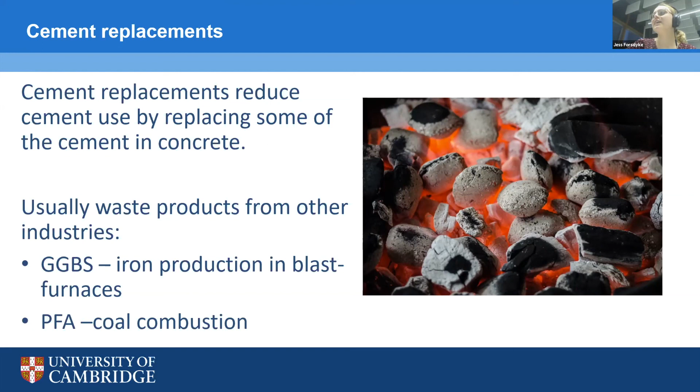Both of these processes are really carbon intensive. And it's great that we're using the byproduct, but we're phasing them out, so they can't last forever as a solution. So the solution we're looking at more towards now is just generally improving cement efficiency.

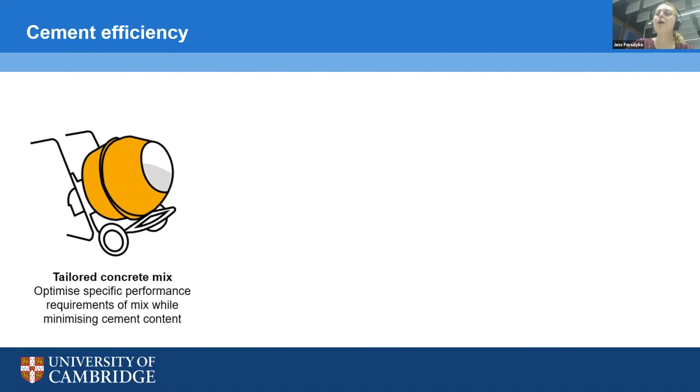We improve cement efficiency by carefully selecting our concrete mixes. That means playing with the ratios we saw earlier in the pie chart, depending on the performance requirements of the concrete, so that we can minimize the cement content and add cement replacements where possible, but it's not always possible. It's already pretty common practice that you use a different concrete in a different place, wherever it's most useful.

And so the next stage really is to say, well, let's do this on an even bigger scale. Where before we'd say we have 1 concrete for the walls, 1 concrete for the floors, now let's say, well, we've got 1 concrete for only the parts of the walls that are actually under load, and another concrete for only the parts that are not stressed and therefore just acting as infill. It doesn't need to be as strong, doesn't need to have as much cement in it.

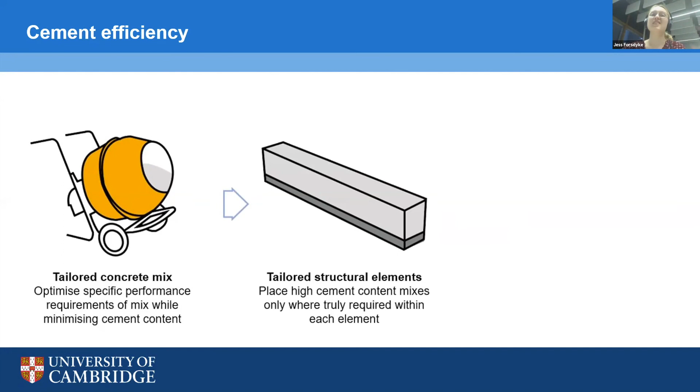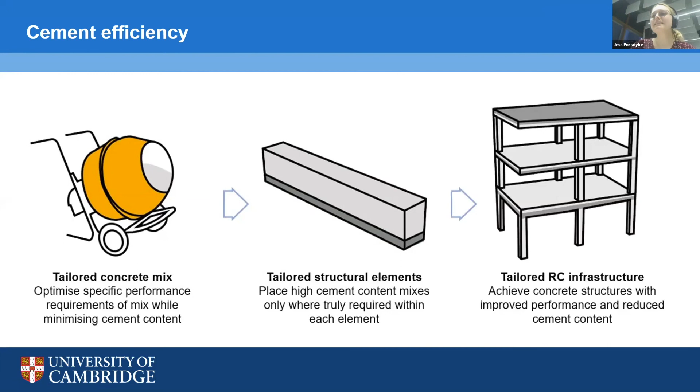And that basically comes to the ethos for the research that the Concrete Infrastructure Research Group is doing. We're hoping that eventually it can be combined with efficient geometry and structural layout to basically minimize over-design and redundancy in structures, so that we can continue to build new buildings with much less cement intensity.

And finally, the last way I've mentioned that we can reduce cement consumption is to improve the durability of structures, so they don't need to be replaced as frequently. The Google definition of durability is to withstand wear, pressure, or damage. So this property defines basically how long something will last. And generally, if you put more cement into a concrete, it will last longer. But that has issues because cement, as we have seen, is really carbon intensive.

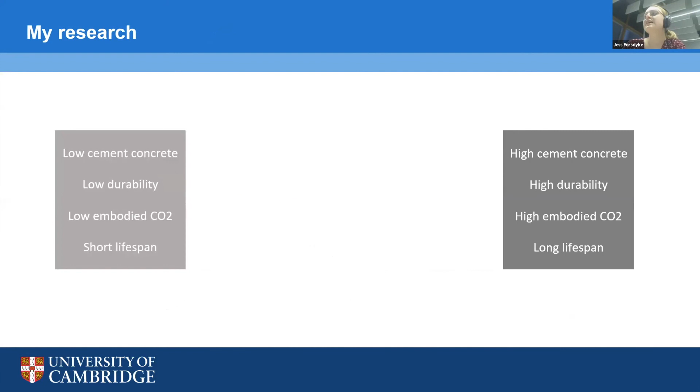A potential solution is to compare a low cement concrete, which has low durability and low embodied CO2, to a high cement concrete with high durability and high embodied CO2, and try to find a comfortable middle ground. One way we're looking into this is to essentially encase the low cement concrete, which forms the bulk of the material, with something of high cement content to protect it as a durability layer.

The challenges this presents are basically how do we do this with the manufacturing methods available at the moment, and what is going on in that interface between layer 1 and layer 2. That's essentially what we're researching at the moment.

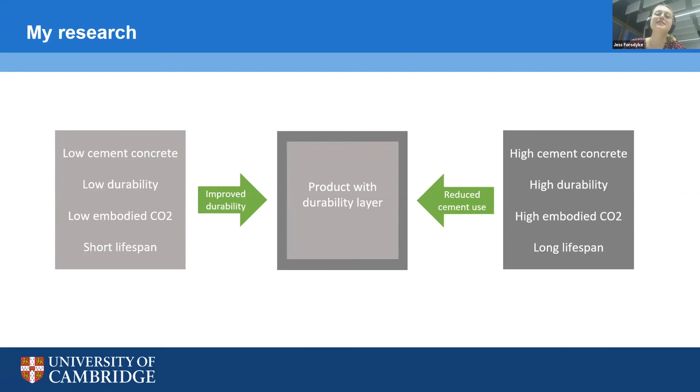Thank you very much, Jess, for a really interesting presentation and for sticking to time as well. If anyone has any questions for Jess, we've still got a minute or two if you want to ask those now.

It's interesting, I was just thinking that the topic of concrete or cement has come up in multiple of these symposia we've been organising, with different aspects to it. It's clearly such an important part of the whole question. It keeps coming back from different angles, which is interesting.

Yeah, I think because concrete is one of those construction materials that is pretty much geographically available anywhere. You can always find sand, you can always find limestone to make cement, you can always find water. Because it's so useful and we depend on it so much, but it has this unavoidable emissions, it is one of the hot topics for sure at the moment.

Great. Well, I'm sure we'll hear lots more about it and hear lots more about your research. Oh, I think I've just seen a question come in.

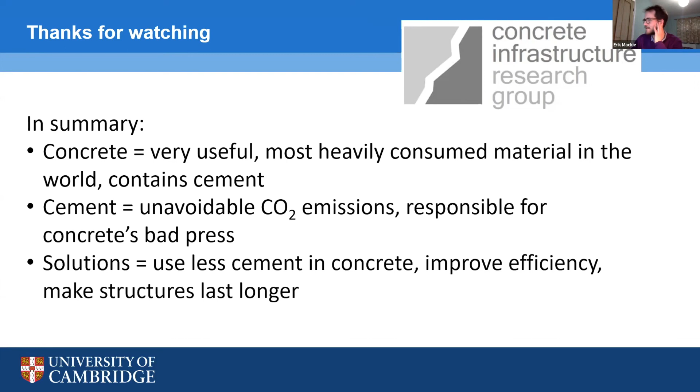From Ethna, who's asking, is there a hierarchy for situations to avoid use entirely in certain situations? I'm not quite sure what you mean by hierarchy here, but are there ways of avoiding use of cement entirely in certain situations? I mean, the best case is to not have to tear down an existing building, so that would avoid use of cement entirely. That is something that is also hugely under research here and in other institutions, looking at how we can best use what's there rather than replacing it.

That's also hopefully where my research goes in terms of durability, because if we build something now that's going to last a lot longer and just doesn't have as much cement in it, then you're hopefully saving future cement as well as current cement.

In other cases, I mean, I actually should have kept my sharing, but if we think about the emissions from other construction materials, it's all just an optimization really. So it might be that, yes, I want to try and use steel instead, but steel is not always actually a better emission option.

Right, okay, thank you very much. I think we'll have to leave it there, because we're already coming to the end of our time slot here.